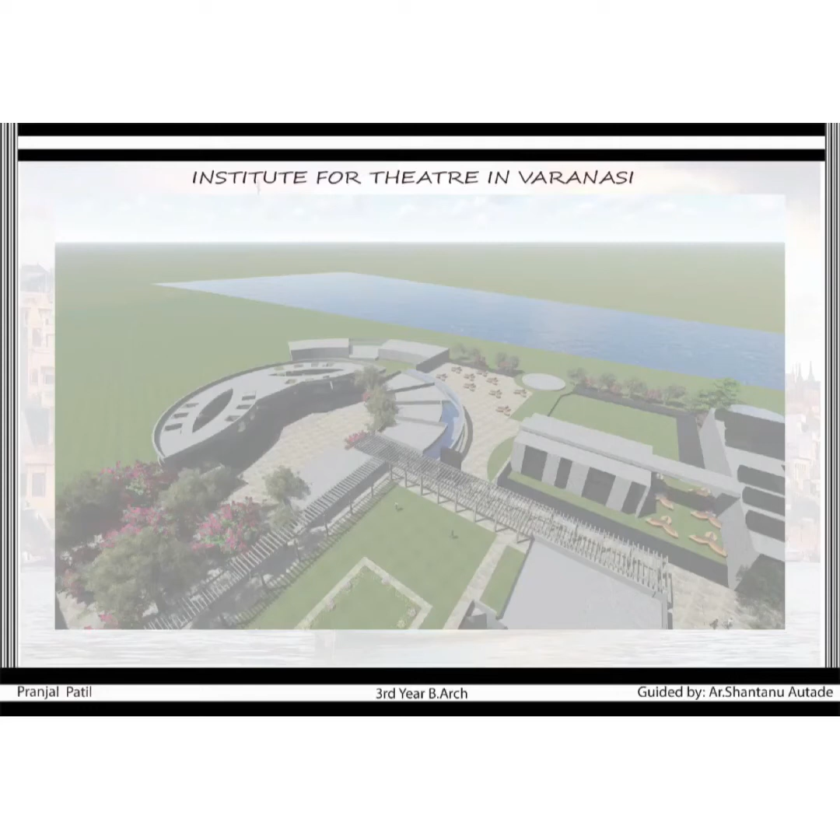Our design topic for the current semester was to design an institute for theatre, situated in the city of Varanasi. We started the process by doing some case study, taking the Indian Habitat Center in Delhi as a topic for my study.

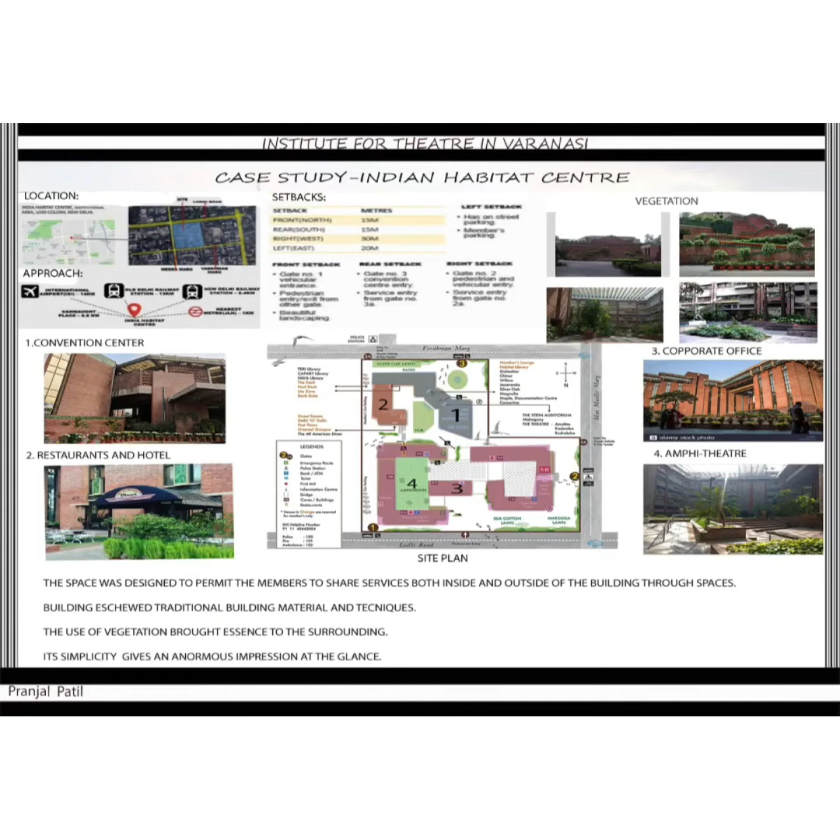The center was divided into 5 main buildings connected by aerial walkways, and the spaces were designed well keeping traditional building material and techniques in mind. Hence, the entire facade is cladded with red bricks, which gives an enormous impression at a glance.

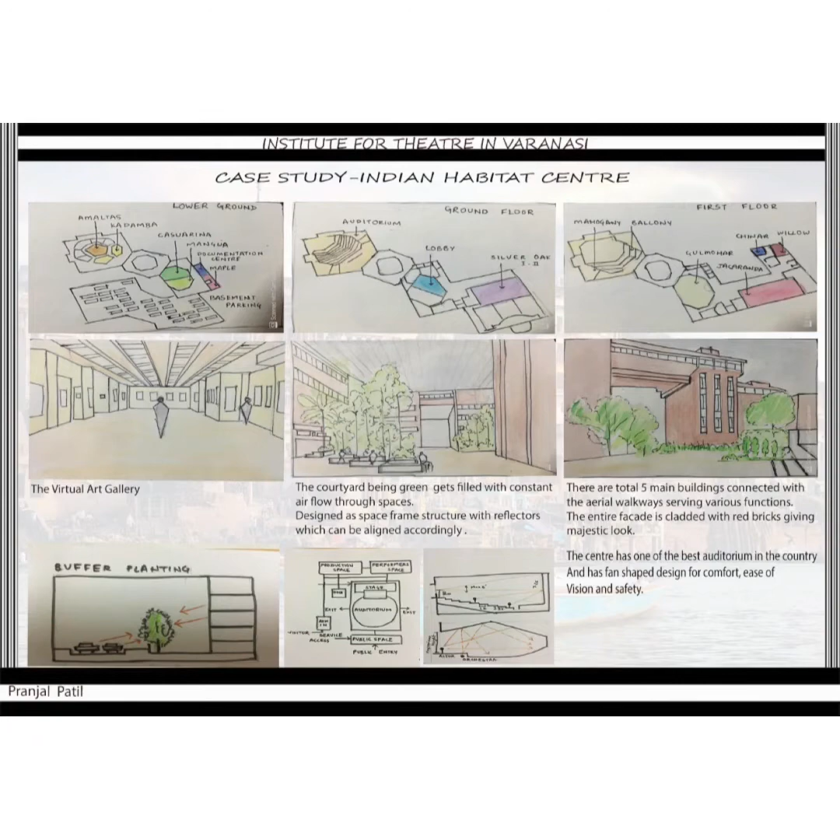The site allotted to us was of total 1,35,000 square meters, and the eastern part of the site faced the river, with the rest of the three connected to access roads. The images also show the places near the site, the sun path, wind direction, and the site section.

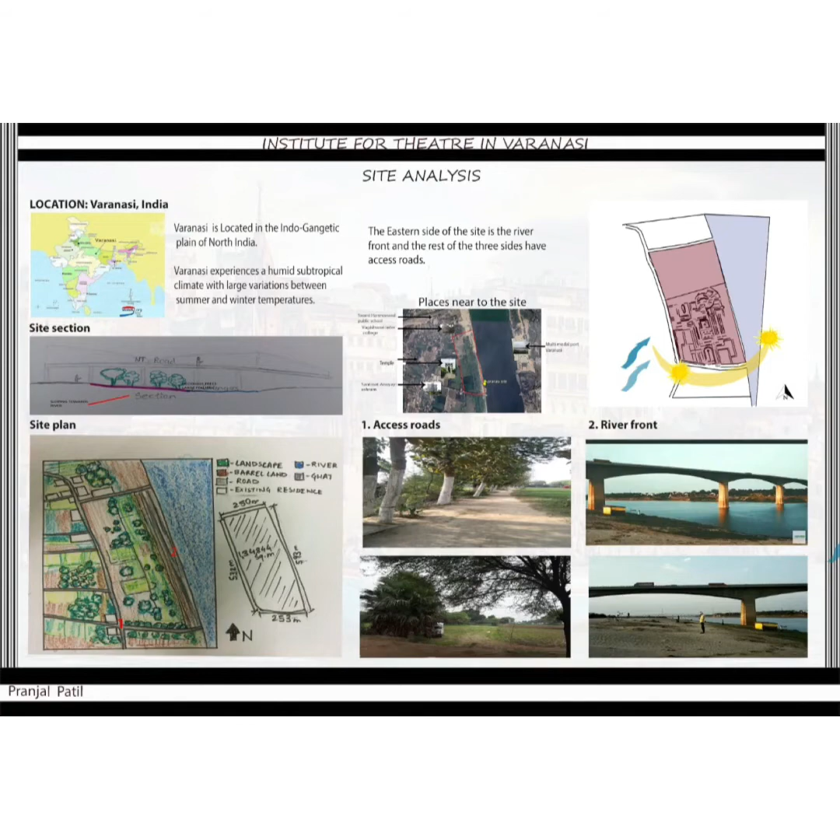For better functioning of the spaces in an institute, the main motive was to separate the public and private spaces, and to enhance the pleasing ambience, vegetation is added.

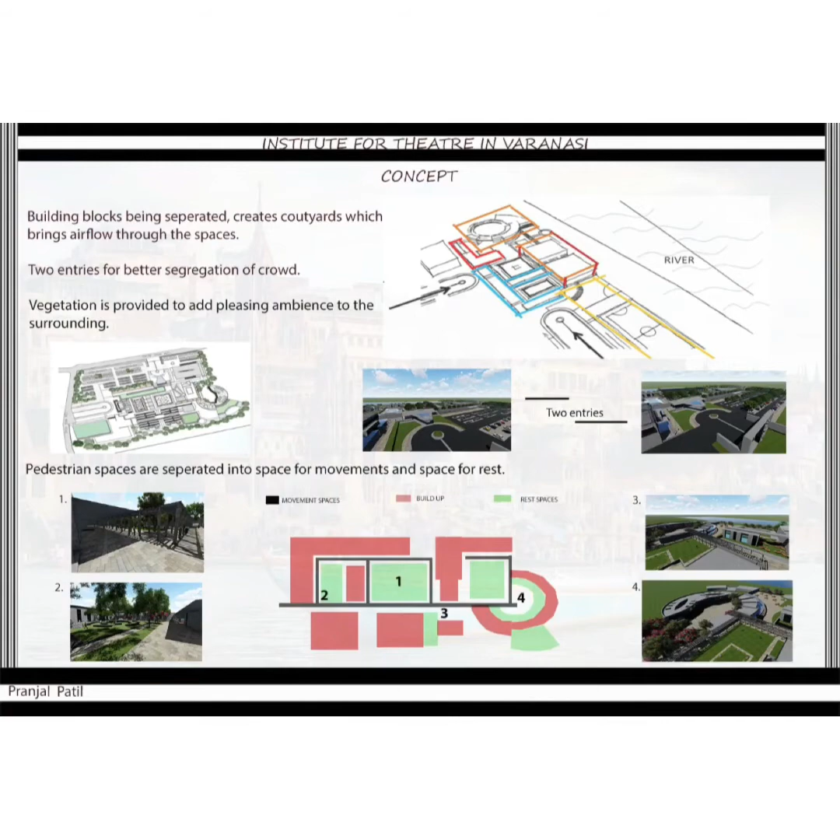The diagram shows the built-up area surrounded by movement spaces and rest spaces for better functioning of an institute. The site plan describes the two separate entrances for the public and for the students.

The roofing is adapted keeping the climatology of Varanasi in mind, and for a more pleasing experience, the library blocks are provided with fins on the roof, giving the effect of light and shadow. Also, spaces like classrooms, cafeteria, cubicles, and workshop are provided with skylights to let in more light.

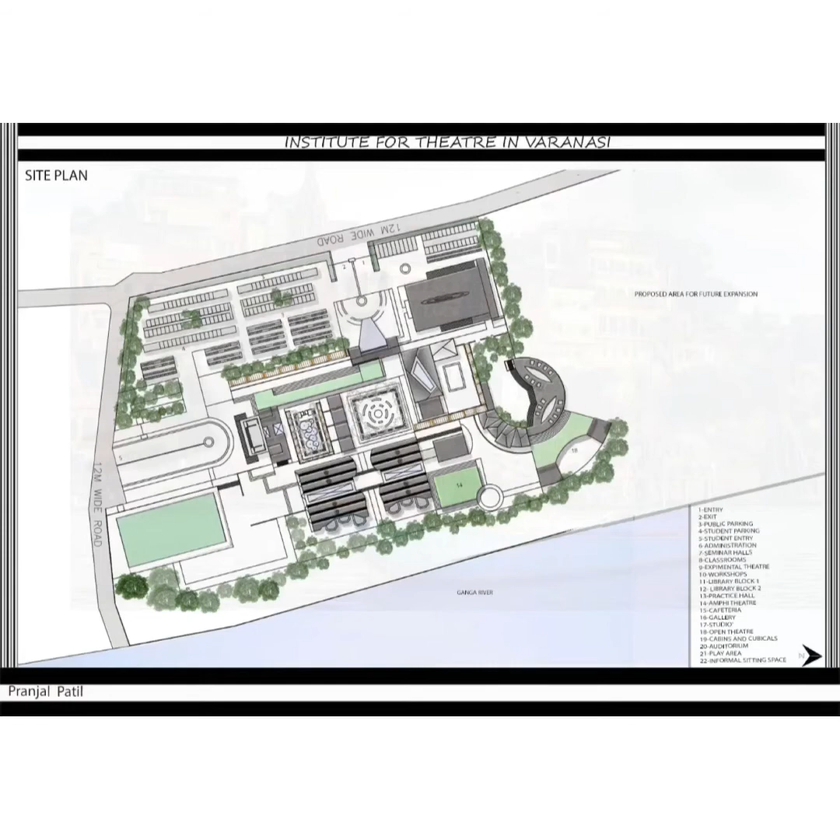The spaces on the ground floor are divided into three parts. First, the auditorium, placed near the public entrance to avoid much interference for the rest of the spaces. Second, the institution spaces to the southern side, containing classrooms, workshops, library, theatres, and seminar halls.

Third is the repertory spaces to the northern side, containing cubicles, practice halls, studios, and cafeteria. Each space is connected through courtyards and vegetation, keeping the pleasing ambience intact.

Below is the section through the site, giving an idea of the slope, which is 7 meters above the river. To the western side is the public entrance, which leads to the auditorium, the cafeteria, the seminar halls.

To the left hand side of the site is the student entrance, which takes them to the classrooms, library blocks, seminar halls, etc. Such arrangements segregate the public and student spaces, which doesn't allow public to get into student spaces.

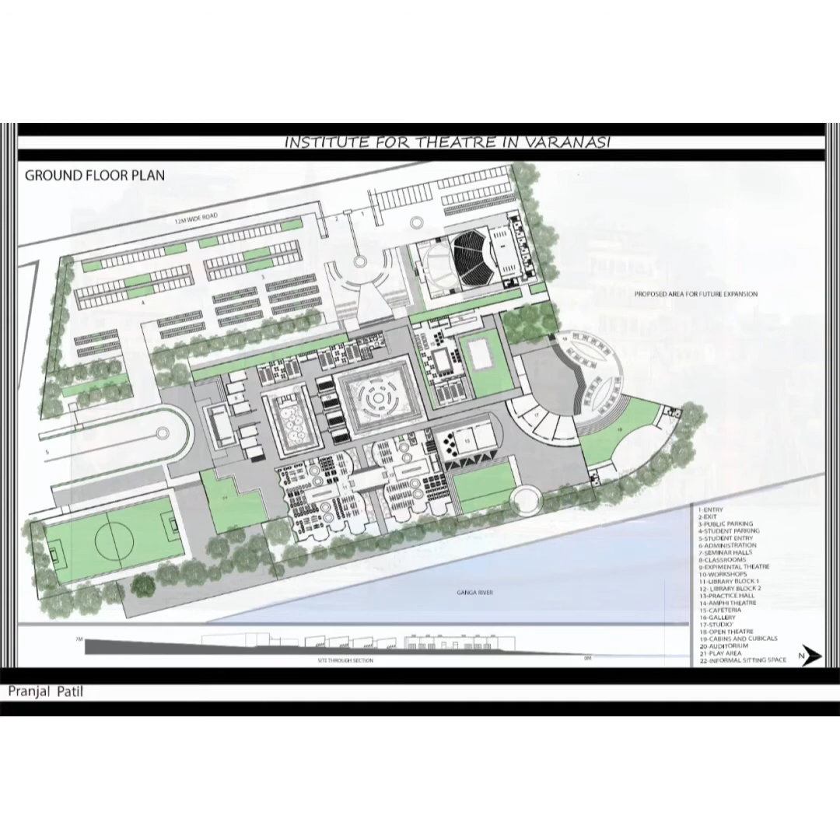This keeps their privacy intact. Most spaces are on the ground floor, except for a few workshops on the southern side with informal seating, and cabins and cubicles on the northern side, which give an amazing riverfront view. The vacant space to the northern side is provided for future expansion of the institute.

The diagrams show the blown up plans of the institute and repertory part. Views are added for better understanding of the spaces provided, and the elevation below shows the scale of the spaces compared to one another.

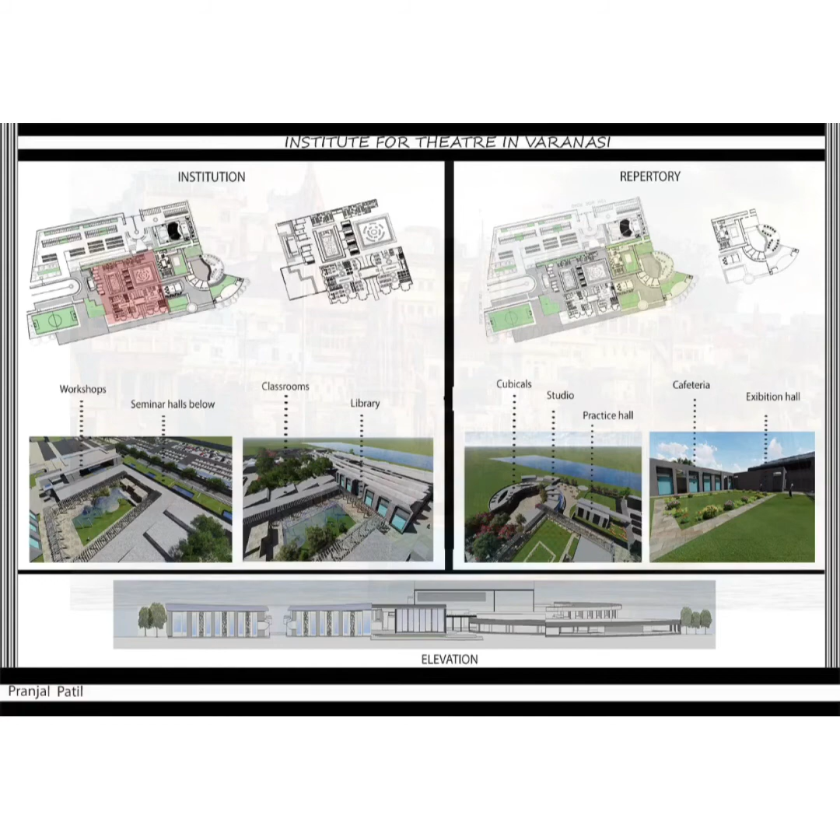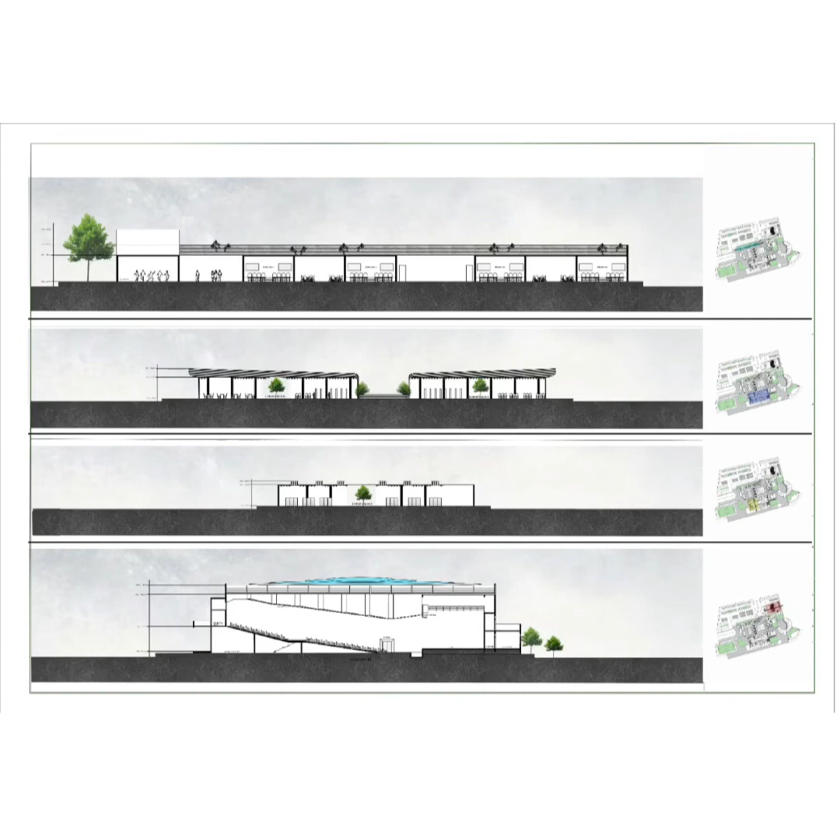To add on for better understanding, these are individual sections of the seminar halls with informal sitting above. The library block section shows the fins provided for better light and shadow effect inside the building. Below is a section of the auditorium showing the scale and proportion compared to other spaces.

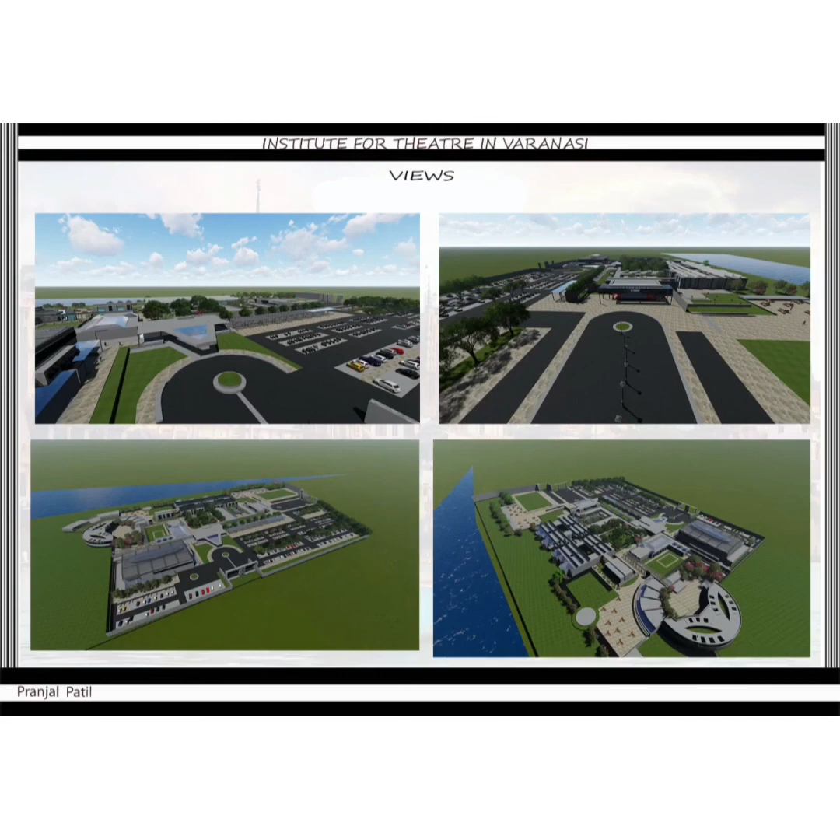Here, the first two views show the two entrances provided, and the next two show the overall view of the site along with the river.